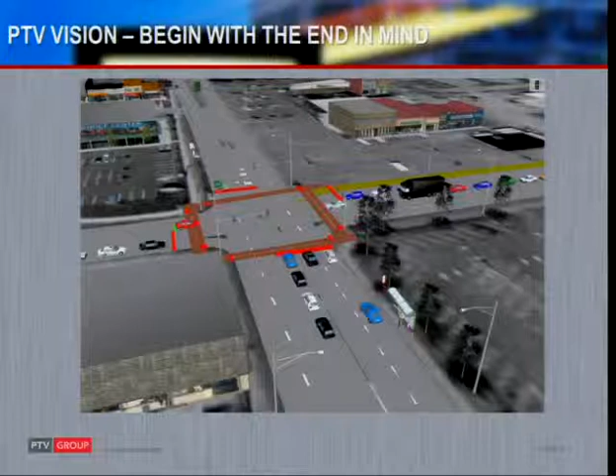So what is multi-resolution modeling? What does that mean? In a lot of cases, that elicits the idea of tools or methods. But to me, what I think is most important, really, I think of geography, right? Scale of resolution. So when I talk about macroscopic models, those are regional models. How do cities interact together? MPO-type models. Mesoscopic models are typically for us corridor models, right? Focus on interaction between or among cities or facilities. And microscopic modeling is actually focused on facility operations themselves.

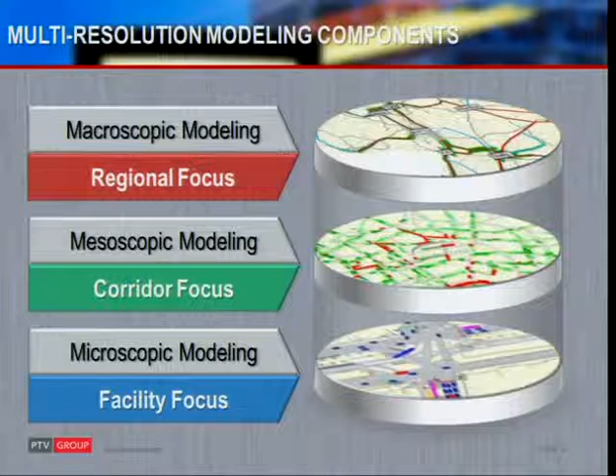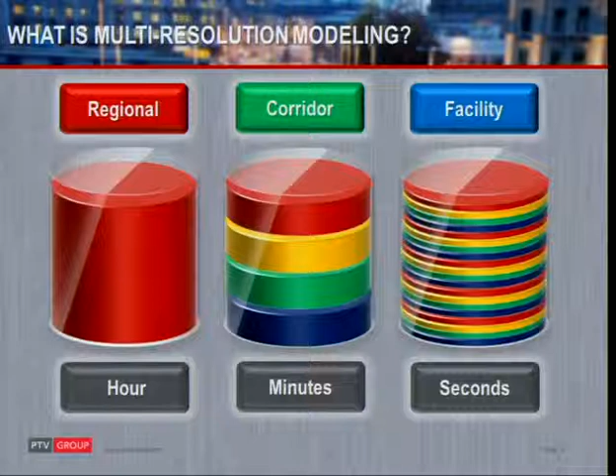I think the other thing that's a key differentiator or component relative to modeling at separate resolutions is the time scale. So in a regional context, we might be looking at a day or a PM peak hour, an AM peak hour, or hours, typically. In a corridor plan, we might be really looking at intervals within the hour, right, or the peak 15 minutes within an hour. And at a facility focus, we're really looking at seconds, right? How do cars accelerate and decelerate and the impacts of that.

So multi-resolution modeling itself, though, is how do we tie the components of these individual levels together, right? And so on the left side, sort of the Venn diagram is trying to pull together what pieces, because each level supports some level of design, some level of modal analysis, and some level of scenario screening, right? So that is sort of in a nutshell what we're trying to do by stitching together these time resolutions and spatial resolutions to analyze each of these elements with consistency.

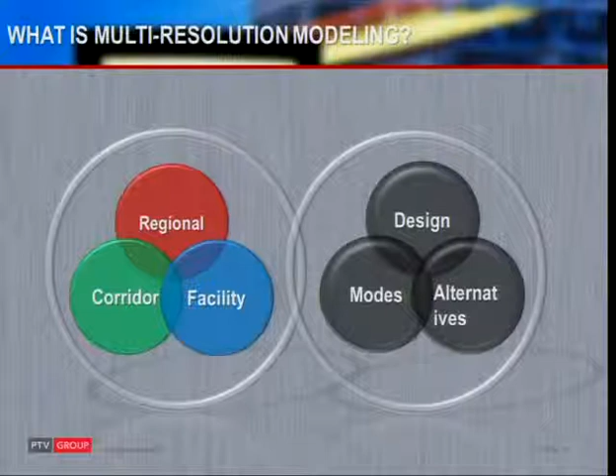So we might be looking at a corridor study, and in that corridor study, maybe we're studying freeway operations, and really we're trying to figure out merge and weave behaviors. But at the end of the day, we're in a corridor, and that corridor is also supported by transit service, right? So we want to know, or at least be informed by the influence that the transit service is able to provide relative to the demands in our freeway system, right?

So what are the keys to success? So I think you need a data model that can support working at different resolutions. You have to be able to support the correct level of detail, whether that's time or modal operations. And you need consistency both vertically and horizontally at the end of the day. So whether that's consistency with plans and assumptions, such as land use or travel making, and across and up and down relative to perhaps mode shares.

So I thought maybe the best way to illustrate some of that was through some use cases that illustrate the different functionalities expressed here through a series of questions. So the first one is, can I work with travel demand model data? And yes, you can. So PTV Visum is a travel demand modeling platform itself.

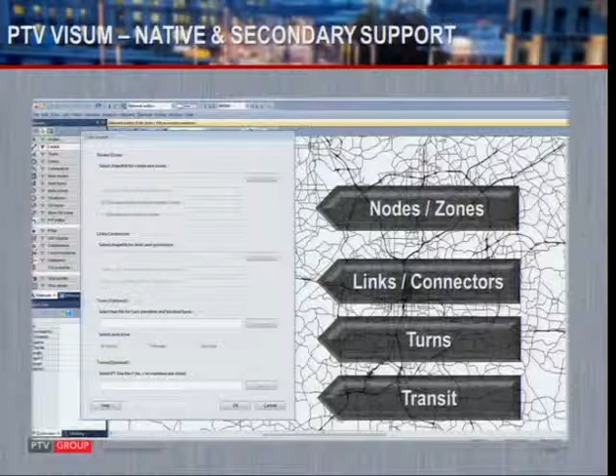But I think the important thing to recognize here is that it supports methods itself, but we also interface with common competitor software or other software in the industry as well. So you don't have to have your travel demand model in our software to take advantage of the features of our software for your applications, especially as they move downstream within our software. So integration with other data is, of course, critical.

And more data is coming available every day, right? So maybe some of you have contributed to OpenStreetMap in one form or another. We integrate directly with OpenStreetMap, so you can use this for background images, or you can use it as a data development tool and extract elements of the network and use it directly within our planning tool.

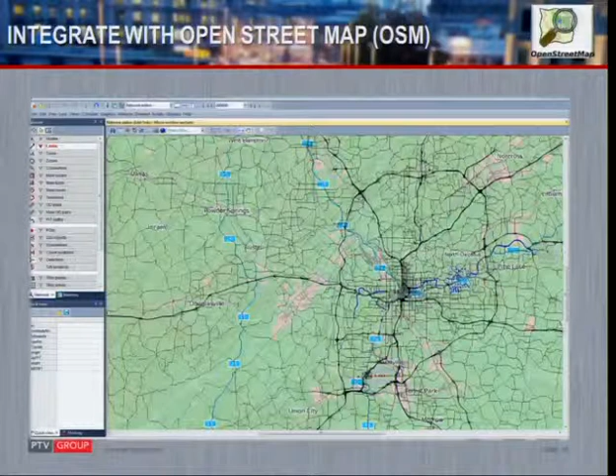We also support integration with commercial data like Bing Maps. So, if you're wondering how many lanes are on a facility or if there's crosswalks or other things, you can easily get to that type of network supply information anywhere in the world.

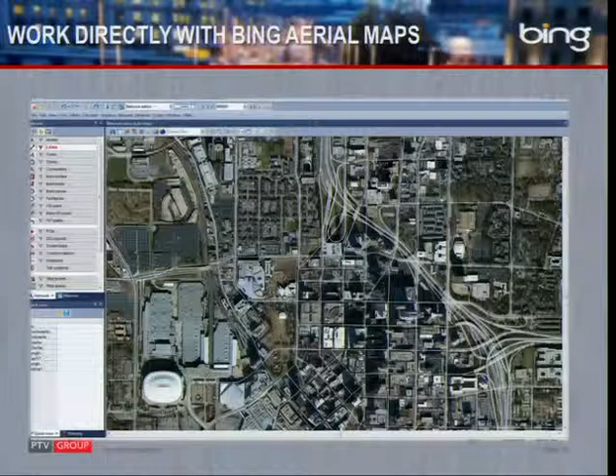The other thing that starts to then become important is the level of detail, right? So an OpenStreetMap network is a connection of nodes and links. It doesn't really know that much about the geometry of an intersection. So we have interfaces. Our data model is set up so that it can handle intersection level geometry. So turn pockets, turn lanes, crosswalks, signal control.

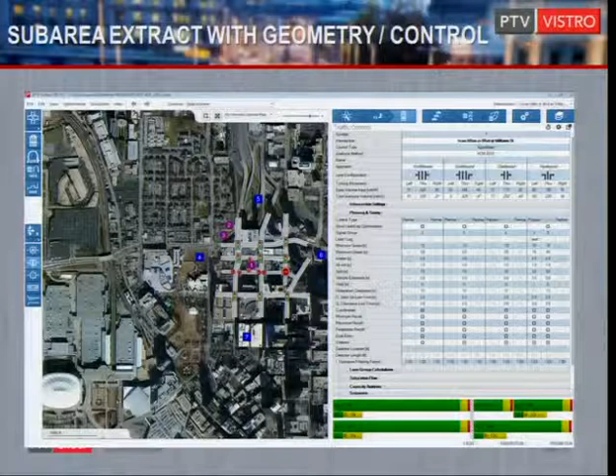So once that data is integrated, you can start to get some level of statistics. So at the top level planning model, we might be talking about volume to capacity levels on links. And in some cases, that might tell us we have values that exceed 1. Well, when we're at the intersection level here and at a level of service, we can still exceed capacity, I guess, in that context as well.

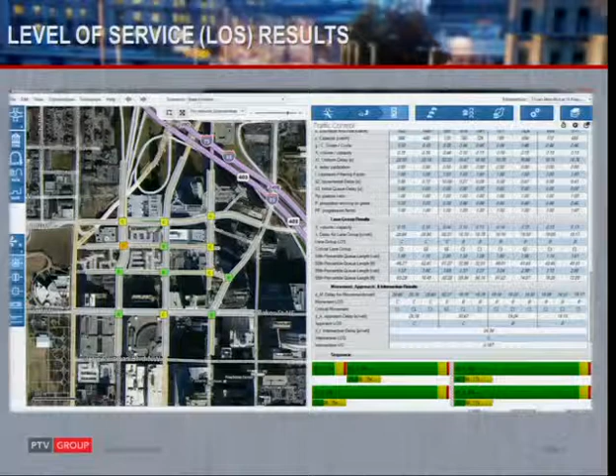But in the framework of simulation, you really can't, right? So you never exceed capacity at the end of the day. So we have screening tools to help you judge how your data is set up and whether it's effective or whether you'll experience problems and where those might be.

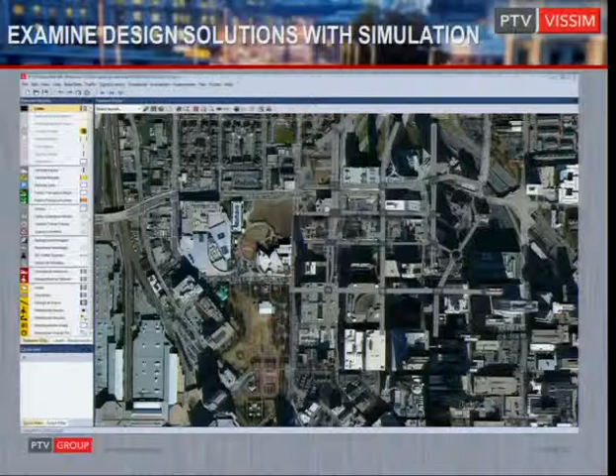So relatively easily, you can go from a static operational model to a dynamic model where you're moving cars with signal control and evaluating queue lengths or other things relatively straightforwardly.

So can I work with big data? Or what is big data, I guess, even in the concept of transportation now. I guess I would frame a little of this context, again, around network supply, and working with things like commercial navigation networks. So we support partnerships with the major commercial navigation providers. So those are TomTom and NAVTEQ or HERE.

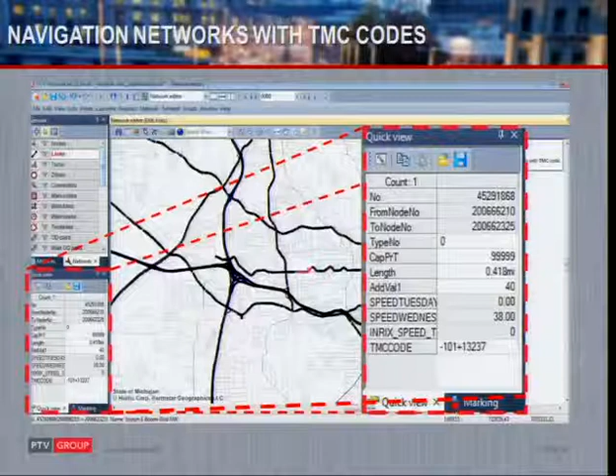And these data providers, they're assembling billions of data points every day, from multiple sources relative to people using the roadways and their representation of the roadways. And they organize this data in a variety of formats, but one of the most common is what's called TMC codes, traffic message channels, which are used a lot in the radio or broadcast industry for reporting traffic. So by interfacing with these data codes, you can interface with data like INRIX, for example.

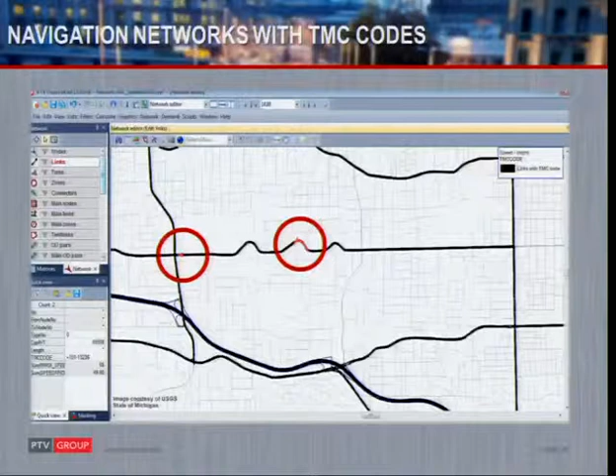And so here is a sample roadway segment that is represented by a TMC code, all the red area. So we can get speed data from commercial providers to tell us how this facility is performing. We also know that that's a pretty big section of roadway, and depending on the level of analysis we're looking at, whether it's the curvature of the road or the approach to the intersection, that might be too much detail as well. So you can see that these segments are also represented by much smaller roadway segments by the navigation system providers. And there's data available for both of those types of scenarios.

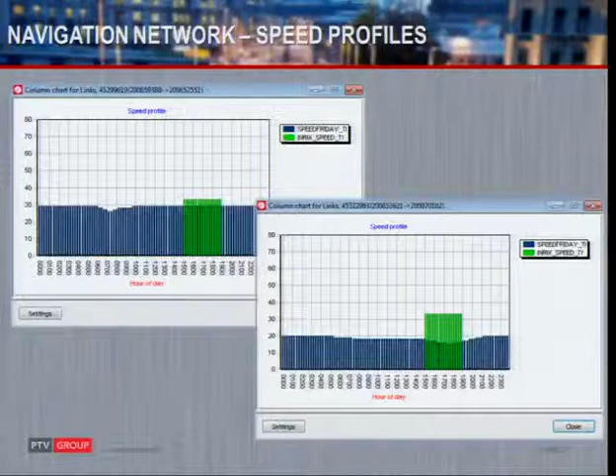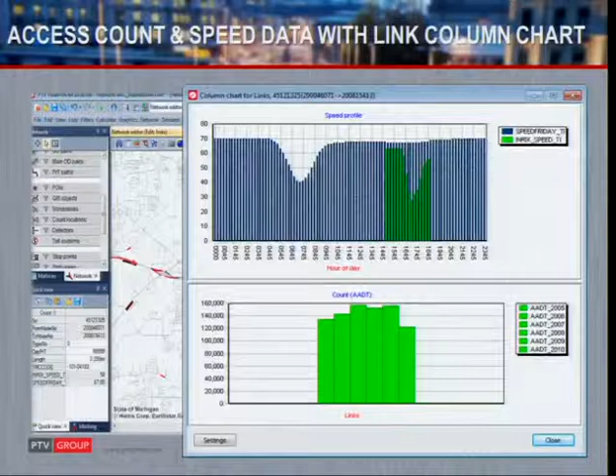So you can get aggregated data that's compiled across these segments, and you can get data that varies on the individual segments. So depending on what and how you're doing, you can use either source to your advantage. So the other thing that we're typically doing is interfacing this data with some of our, you say, ground truth. Typically that's traffic counts collected by the city or the state. And what we do is organize those in the same frame so that you can not only be working with speed data, but you're working with volume and count data as well, all in the same interface.

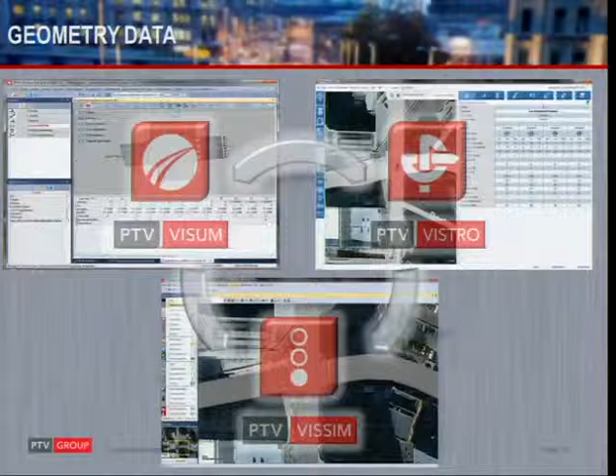So can I add detailed network geometry and control data? Well, you've already seen a little of that, so I've already answered that question itself. But the thing that I wanted to highlight here is that it's consistent across all of our tool sets, the geometry and particularly the control. So if you've entered signal timing at our top level model, you can use the same signal control data in our simulation model. So there's leveraging of the data sources themselves. Here's an example of the signal timing interface.

So time dynamics is also the other thing that's pretty important. And here I'm going to show just a sample of a time dynamic model that was used for evaluating the Olympics and people leaving event venues at the Winter Olympics in Vancouver a few years ago. The important thing about this particular set of images is that this is a time dynamic capacity constrained assignment that is using a linked node structure.

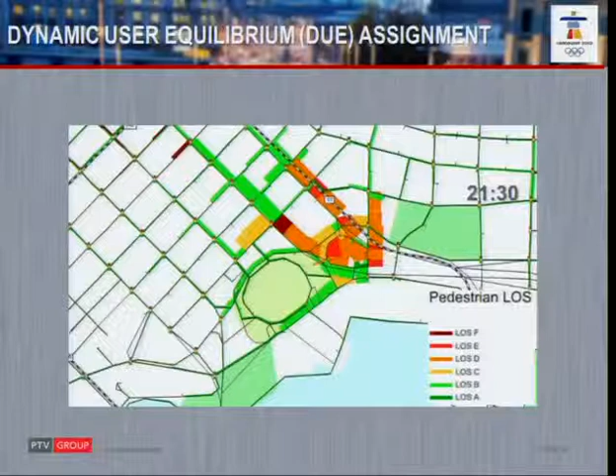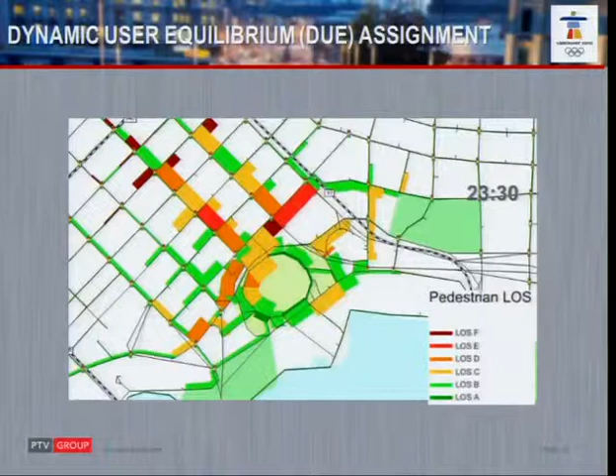So we have time dynamic assignments that conform to traffic engineering theory, and these can also be extended to incorporate things like, in this case, pedestrian movements. So we're not actually looking at vehicle movements in this particular case, as people exit the Olympic venue and are actually, in fact, destined, mostly in this case, for transit service, indicated by the black checkered lines. So you see the densities, the spreading out of the traffic, and the queuing that results on a linked node basis. Again, the important thing relative to this is that we can seamlessly move these and convert these into vehicle inputs and routing decisions for our simulation tool.

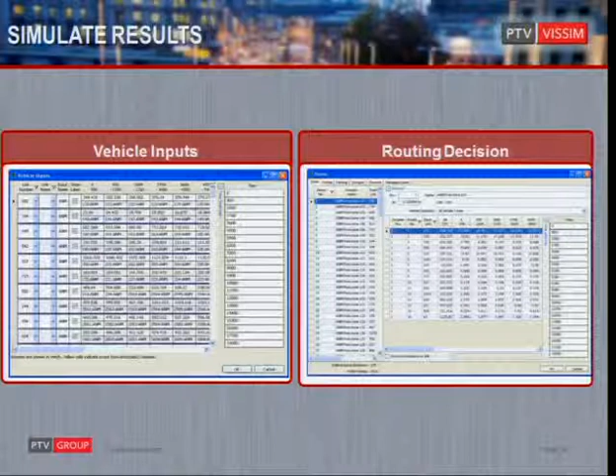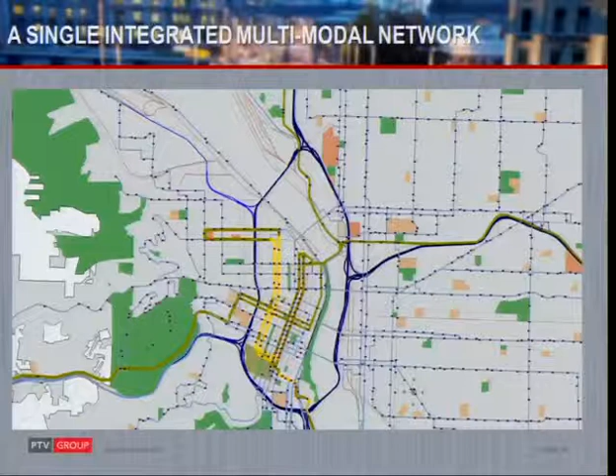So this is what I would term supply-side data fusion. I think the other component of data fusion that is critical in working with transportation is demand data. So we have a suite of tools, the family of tools basically considered ODME, or origin destination matrix estimation tools. But the important thing is that the tool set itself gives you a lot of parameters to work with so that you don't over-distort your data. Right? So I'll give you a little bit of an example.

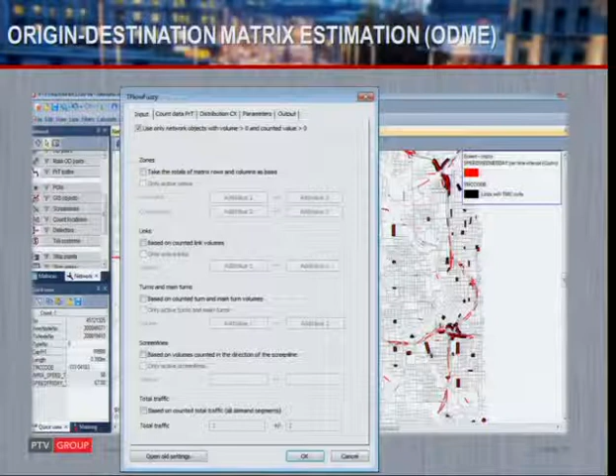And whether that's working with turning movement data or trip length distributions, or whatever the sources of data you're working with contain, if you're matching one to the other, you're losing some properties of one to gain sort of a fit with the other, right? So at least we give you some diagnostics that help you evaluate whether you're doing that in a way that is consistent with some of your other assumptions.

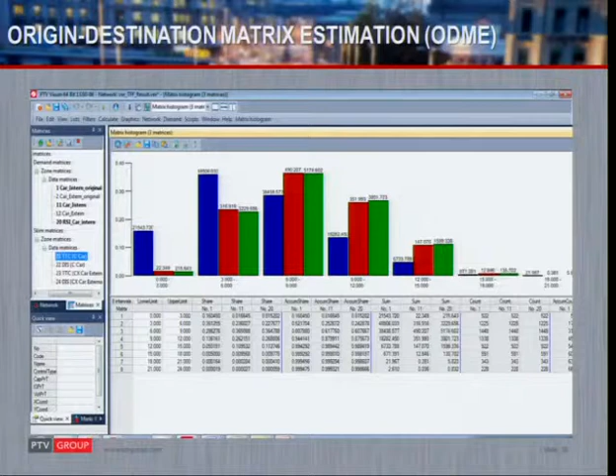So in this case, we're going to change our demand to more closely represent what we've matched in the field by observation, and then maybe we're going to scale it to represent the difference between how much we've surveyed and what the actual population looks like, right, to get an estimate. So that in a nutshell is sort of our planning and engineering tool set for day-to-day use. If you're a planner at Metro or an engineer at ODOT, you can be using any one or component of these methods, and ideally, a multitude of the methods at the end of the day.

But how does this fit into traffic management, or can we do more with this than just plan capacity or improvements for a new facility? Can we use this planning level information to help travelers, residents or constituents today? So this is an outline of what we see as an advanced traffic management center evolving into today. If any of you have visited the city of Portland or ODOT, some of this is actually happening today, right? Where we have cameras, we have sensors, we're measuring and collecting some level of incidents or other events that are happening in the system. Right, we're checking some of those.

Are we using that in any level of planning? Are we using that to affect future events? Well, yes, in some cases we are. Maybe for the Trailblazers, we have certain plans because we've measured and collected a certain amount of data relative to handling game day events or special events. So our tool sets come in this recommendation and execute toolbox. We have technology to forecast or predict not just 20 years from now, but 15 minutes or 20 minutes from now, the traffic state.

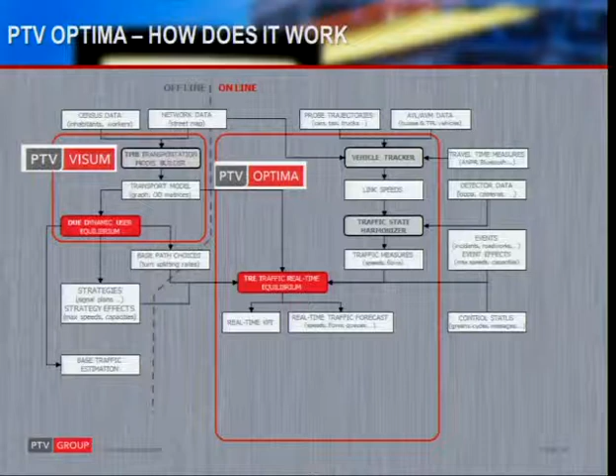When we're working at our desk and we're going to evaluate how a freeway or an arterial is going to perform, it's not a big deal to wait 20 minutes or 30 minutes for some computer processing. Well, that's a little too long if we're going to predict what's happening. By that time it's already too late. So we've enhanced our algorithms, and we've built on top of those algorithms so that we have, in fact, the speed to make these calculations and compute these types of things ahead of real time.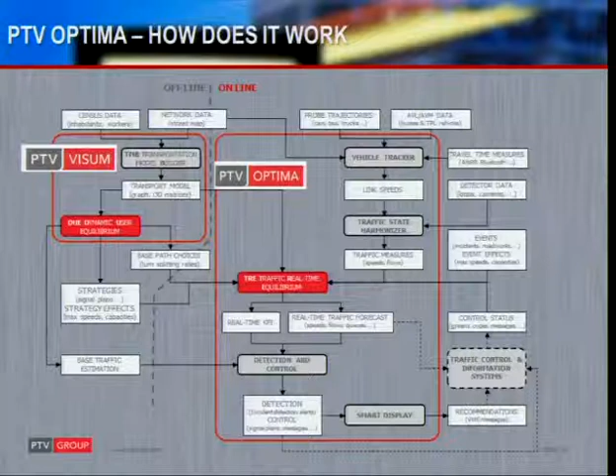And of course, the more that they interface with not just receiving information from the system, but we can also then use this to provide information out to the system in terms of variable messaging signs or speed harmonization type applications. So if you drive in the 217 corridor, we're putting up some variable speed messaging signs. Well, those systems can, in fact, be informed by what the traffic demands are going to be ahead of time as they're setting themselves up to respond. And I guess that's the last piece of that.

I guess in simple terms, how we position this is really as an add-on or an amplifier to the system to be able to propagate, fill in where we don't have information, and turn existing information into better quality information at the end of the day.

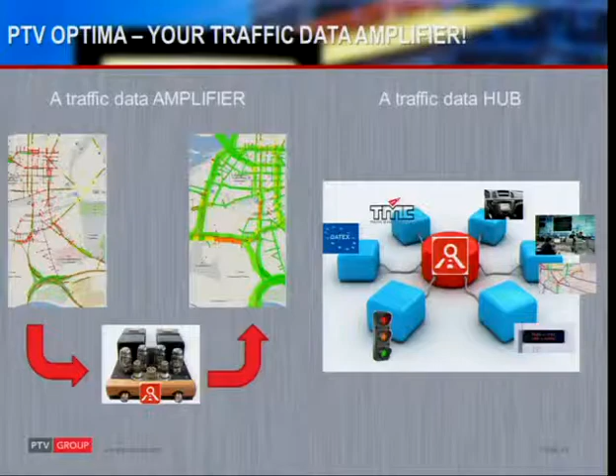And we did that by working with their regional travel demand model to help identify and prioritize corridors. We worked within those corridors to figure out what types of treatments would be most effective and where we could gain the most benefits, and then used that process itself to select a corridor to actually evaluate and provide treatments for. So I think this is a really effective method of planning. Hopefully we're helping people do this more and more every day to make better decisions.

And I guess in summary, I would say these approaches and our tools help decision support at each level and across the individual levels. And that's the end of my talk. So I was told I should leave adequate time for questions. So now it's open to questions.

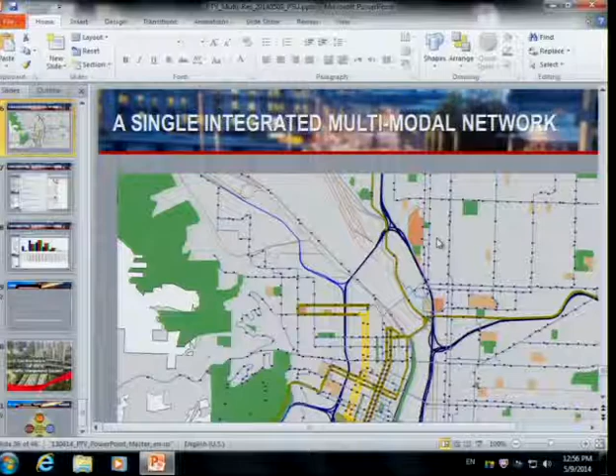Anyways, but I did have some other questions. Okay. Just for